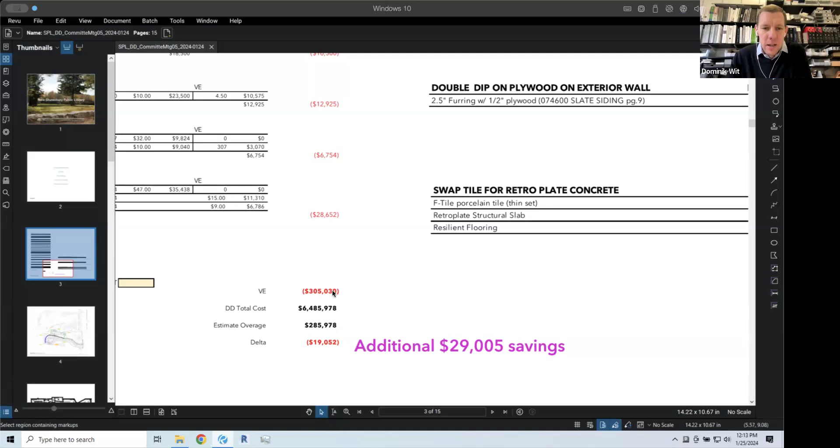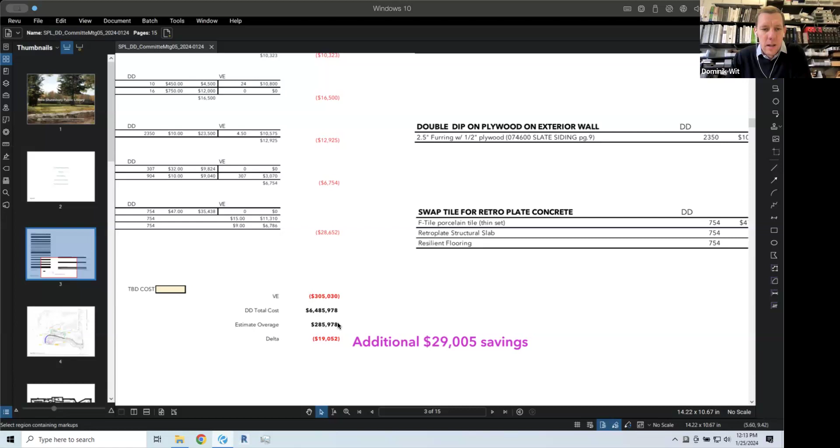Looking at VE, going to the next slide, I had presented to you previously as a group a bunch of items that were approved to be targeted for value engineering. This is the list here, where we were able to get our target down - we were able to VE $300,000 and get basically down to $285,000. I wanted to highlight here to the right, there were a couple of items outstanding.

Replacing the concrete sidewalks with bituminous paving - my estimates were very close, so we managed to confirm that item here. There was a double dip on plywood, initially an estimated square footage cost, that was confirmed, so we actually saw a little bit of savings here with this number. And then we investigated retroplate concrete finish for the entry lobby and circulation space - we were able to see $28,000 savings there if we go with that. So we've rolled those back in.

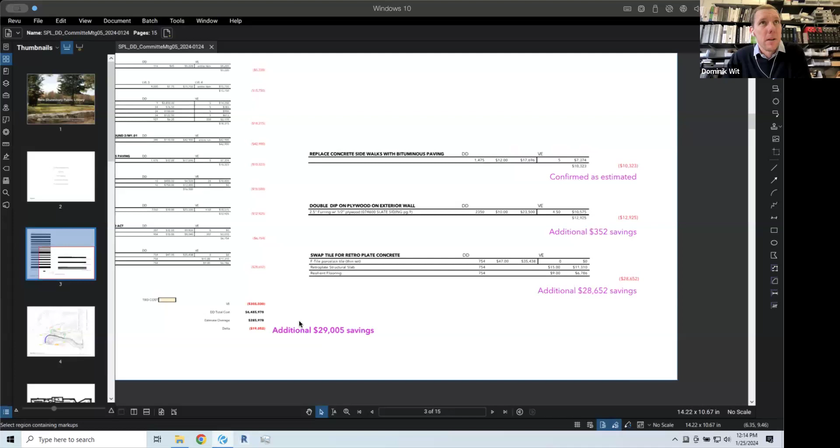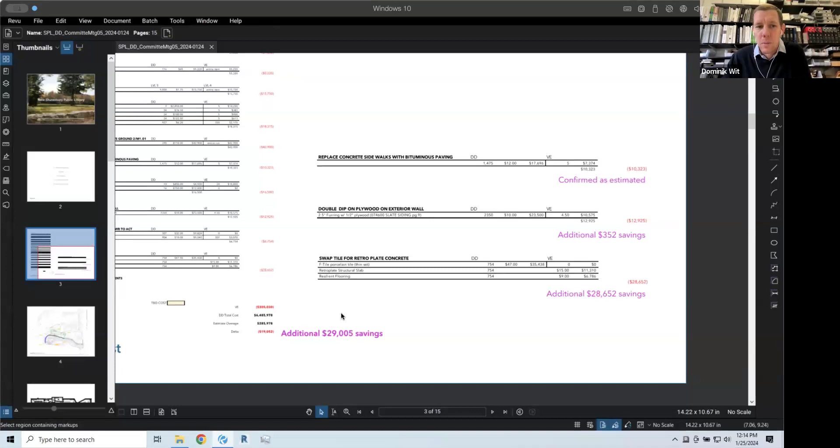I wanted to just highlight that, being released into CDs and going through CDs, we're going to continue to investigate cost-saving measures, some of which are the acoustic ceiling treatments. We've been discussing with our acoustic consultants alternatives for acoustic drywall, which we will continue to do and we'll review with you.

And as well with mechanical - our mechanical engineers are looking to, for the transformer, swap out aluminum windings instead of copper. These cost-saving measures we are not evaluating until the 75% pricing set, but our mechanical engineers are also spearheading value engineering strategies, that being one. By swapping to aluminum, the difference between aluminum windings and copper is an efficiency question, and because of the small size of our transformer for this project, the efficiency to use copper is not really warranted. So our mechanical engineers are very comfortable to swap to aluminum - we don't really see a great efficiency required there, so they're happy to make that transition.

They're also looking at changing electrical conduit in plenum spaces. So we actually spec electrical metallic tubing, which is nicer, but we can change that to metal clad - it looks like a perforated pipe. That's just a very simple cost savings measure, so we decided to focus on that as well.

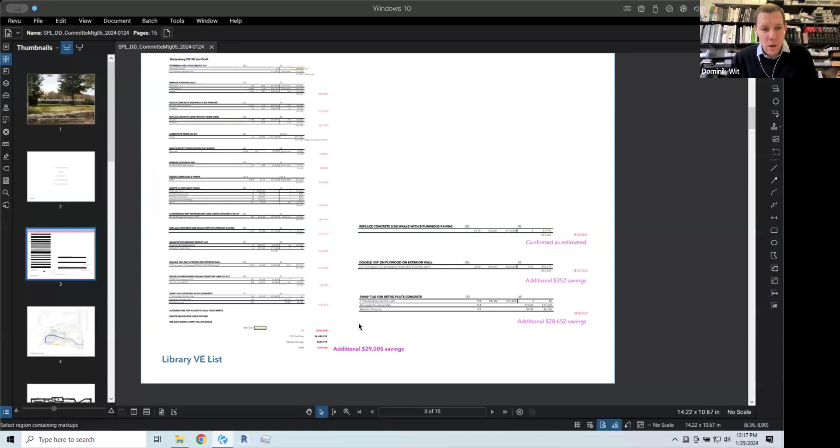And then the last mechanical item is to separate the ventilation and heating and cooling control systems as independent panels - it's actually more expensive to consolidate the controls panel for both of them. So that's a question to the library and the user facilities person: you can still control both systems, right? We have two systems, one's ventilation and the other is heating and cooling. If we make independent controls for those, we save some money.

Dale, I see your hand up. Yes, I just want to make a note that in this area, we generally do not run condensate pump water to the exterior, mainly because of freeze-up problems. So I would suggest a strategy where we can do something interior, because for sure it will freeze.

That's a very good point, Dale, and I know our engineers are aware of that. I haven't fully investigated the infrastructure or what their thinking was to do that, but if they agree and warrant that it should go inside, maybe there's something in the janitor's closet that we could bring it down into the mop sink or something. That's a very good point - thanks for bringing it up, and I'll definitely make sure to coordinate with them about that.

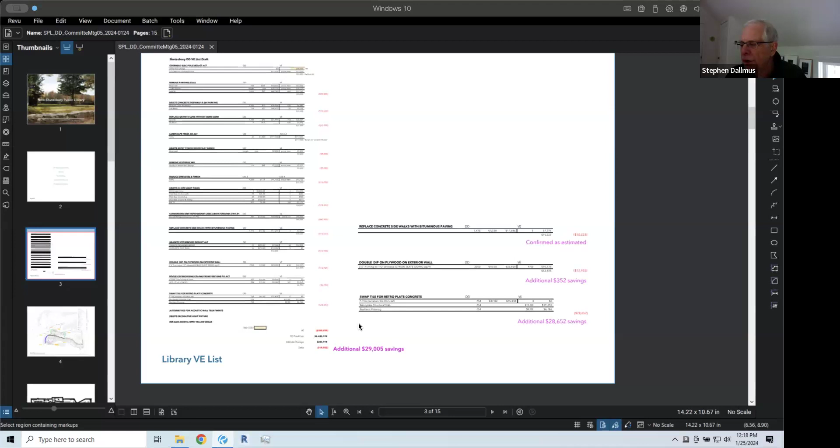Stephen. Is this condensate water from the ERV, or is this from the... Okay, yep, that's right. Thanks. Yep.

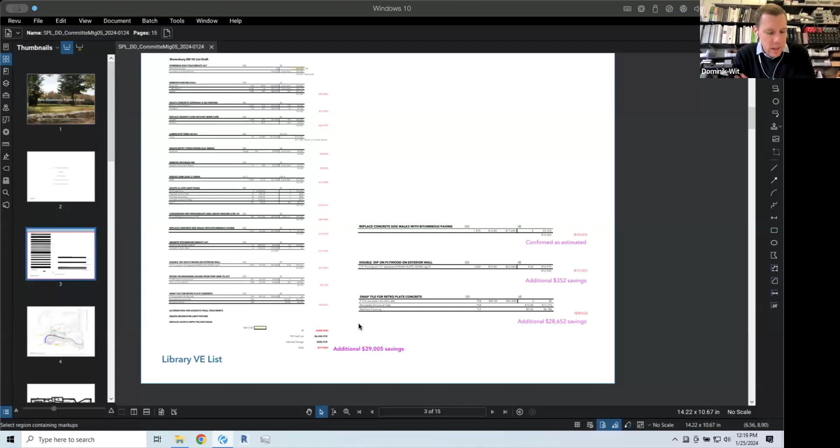And then related to the other divisions, landscape has a lot of value engineering going on. I wanted to bring up a plan here that highlights some of the strategies we're incorporating.

I also wanted to mention that our landscape architect is investigating a better unit cost for pavers. Our cost estimator takes a medium line for cost of materials, and our landscape architect feels there's room for improvement. So they'll look to specify a paver that is more cost effective.

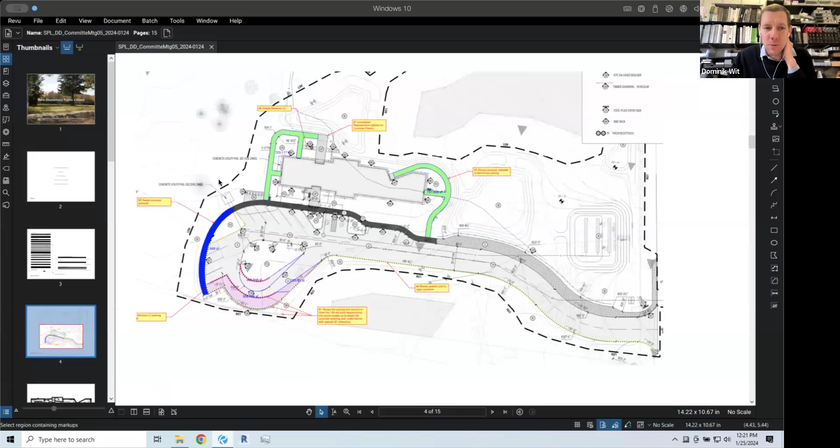They'd also like to have input on engraving and the donation strategies you guys might be investigating, so we'll keep an open line of communication with you and our landscape architects about how these engraved pavings might work. They're also deleting benches. Again, everybody's scrutinizing cost savings as we move through CD, so I just wanted to bring your attention to that again.

Moving on to the plan, quickly highlighting architecturally, we are also looking at additional cost saving measures, not just floor treatments, which we've already looked at. By code, we are able to delete this second egress door to the meeting room, which will simplify the condensing unit refrigerant line entry into the building.

The Library of Things millwork is a high spec finish millwork piece that we are also strategizing to save money on, still having the same function but finished more cost effectively. Similarly, the storage closet for the staff workroom in the DD set was a high spec millwork piece. We can look at alternatives for that.

And again, we're investigating the acoustic wall treatments along this demising wall. Moving on, I wanted to bring up the roof insulation.

We did an add alt. Oh, before I move on, Penny, I see your hand is raised.

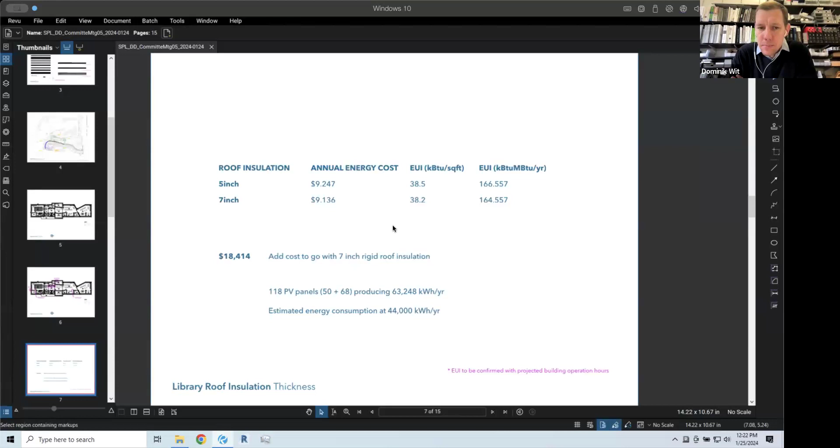Yes, can you go back to the last slide? Sure. Have bathrooms moved? They have not in this plan, okay.

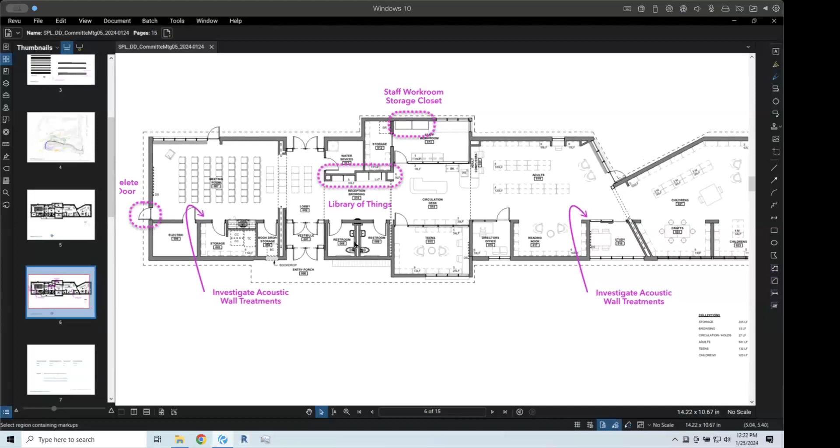I do have a slide at the end of the presentation that will discuss the bathrooms as it relates to code. Okay, I guess for some reason I thought they were next to the community room in previous drawings. Did I misremember that? There were iterations where we had them in other locations, that's right, but this is definitely the location that we held for DD.

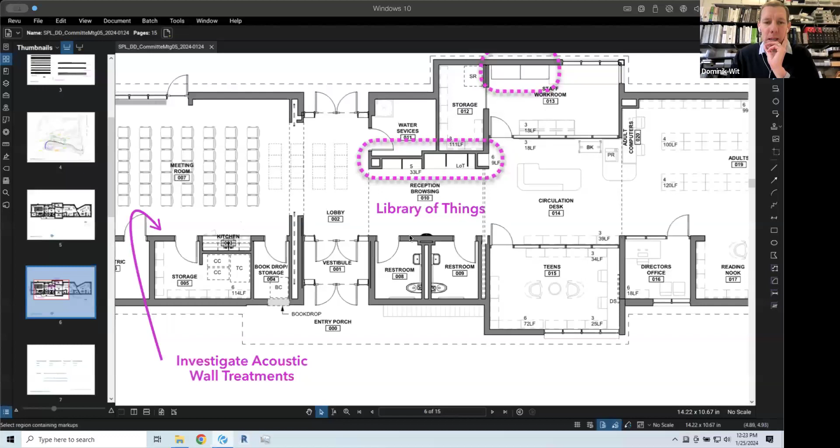Yeah, okay, thanks. Just to orient you again, for after hours we have an after hours security screen here. So we want to make sure we include the restrooms with the meeting room and the spill out space, to make sure that after hours functionality works, and restrooms are available for that.

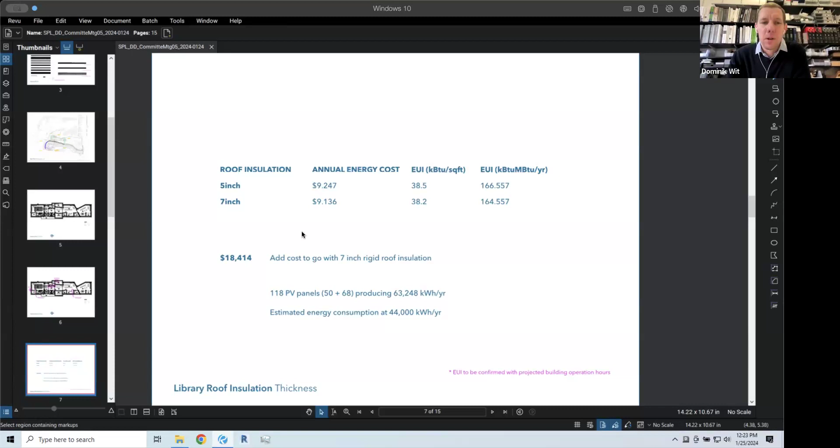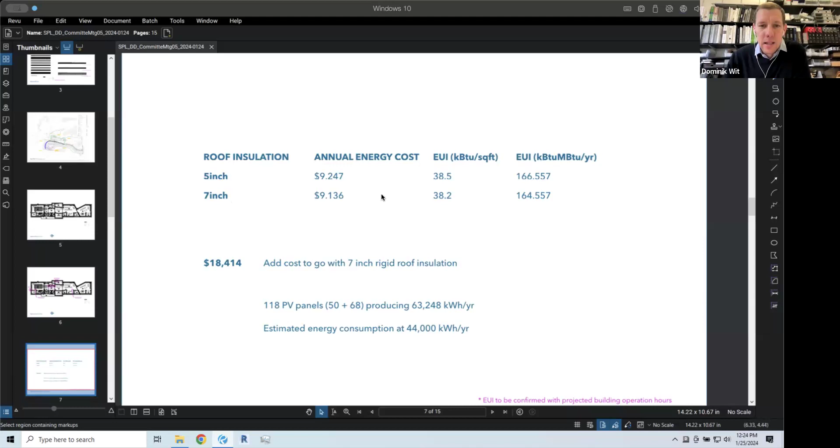So for the DD cost estimate, we did an add alt for the roof insulation. We wanted to evaluate whether we would see energy savings if we increased our roof insulation to 7 inches from the normal 5-inch thickness. Our mechanical engineers did an energy evaluation, and the energy cost savings per annum is negligible for the cost increase to install 7-inch insulation.

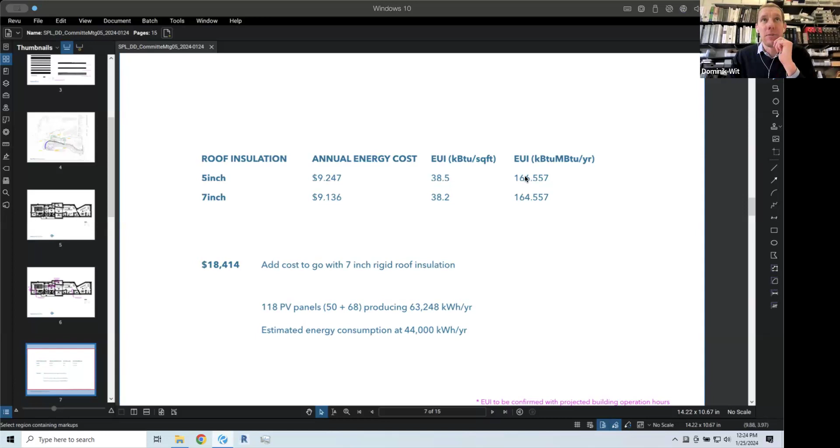So funnily enough, it actually does not really benefit the project to go with thicker insulation.

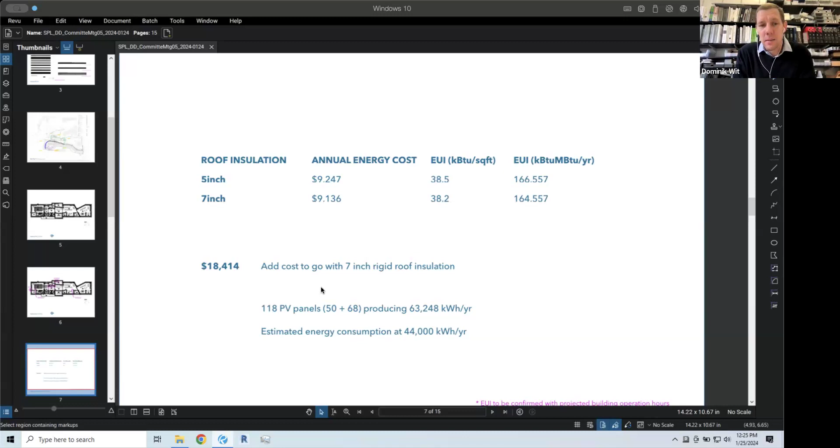We also have photovoltaic PV panels producing energy. We're doing an evaluation of energy consumption to make sure we meet net zero. We recommend that we stick with 5-inch insulation, and we see cost savings there when compared to the 7-inch option.

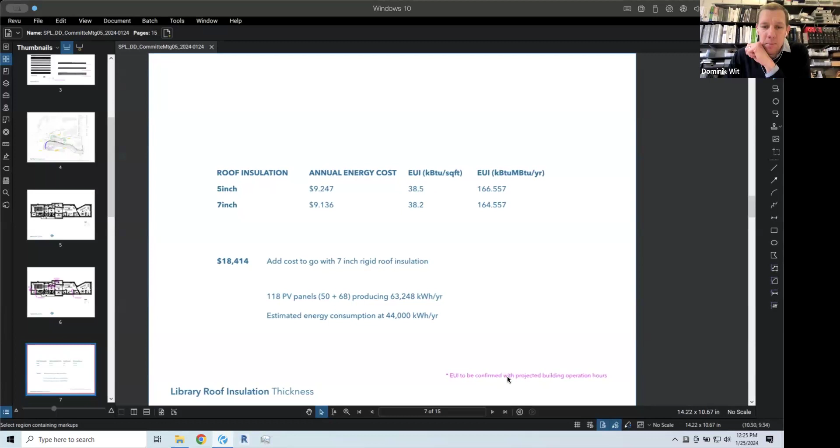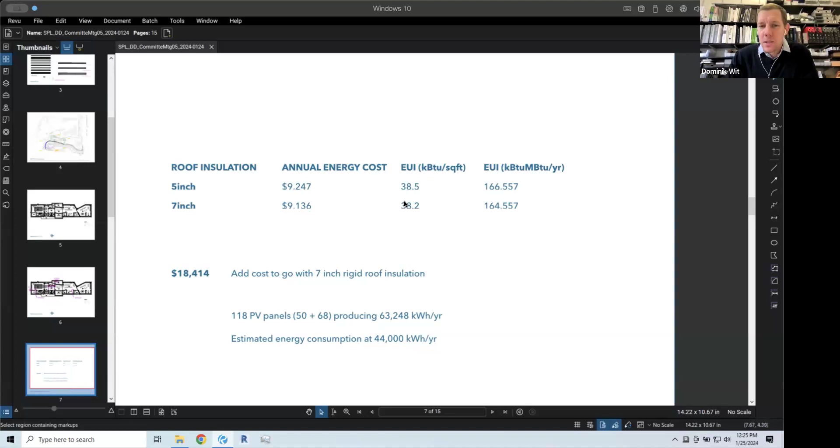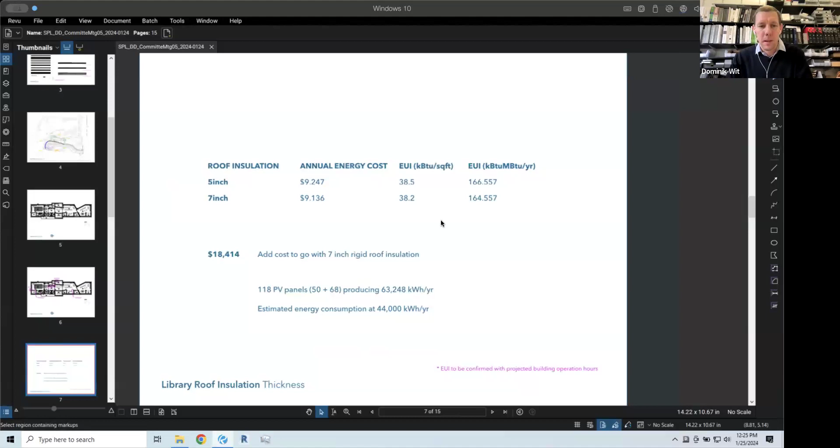There was a question from MBLC as to the evaluation of the EUI. The EUI is a calculation to show efficiency of building energy use, and we think our engineers are calculating a certain schedule of library opening that might be skewing these numbers. So I wanted to bring that up. We will continue to investigate that, and Marianne will coordinate with you about projected opening hours for the library, because the building runs at different settings when you have patron visitation versus when you're closed.

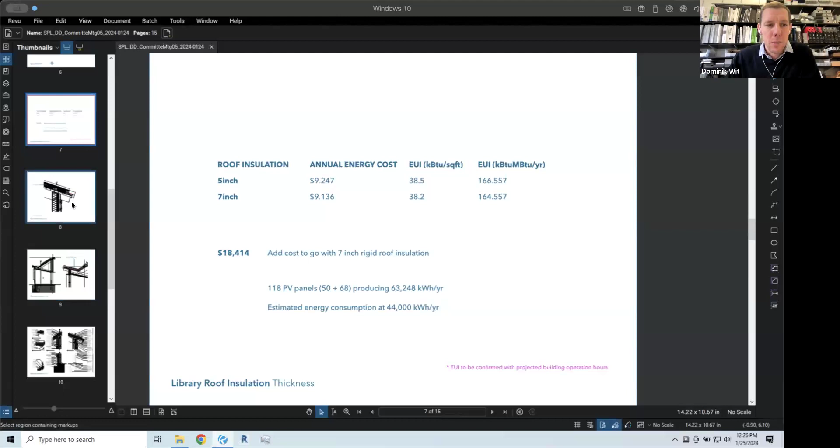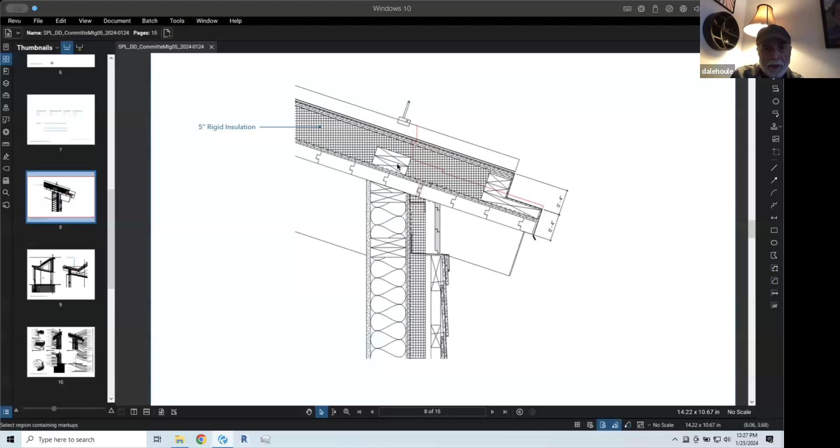Yes, Dale. I'm curious why the double blocking on top of the wall - it creates an obstacle for getting a tight fit on the insulation. Yeah, good question. It's a requirement from our structural engineer - it's additional chord blocking, as they call it. It helps support and make the roof rigid, it reinforces the diaphragm of the roof plane. That's my dumbed-down version of how I understand it to work. We definitely need this, and it's a common detail we've had to implement on tongue and groove wood deck roofs with glulam girders. So that's the explanation for that. Okay, thank you. No problem.

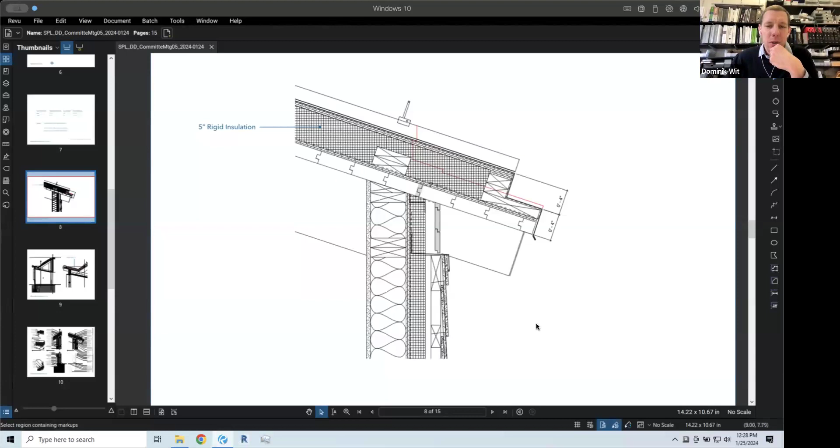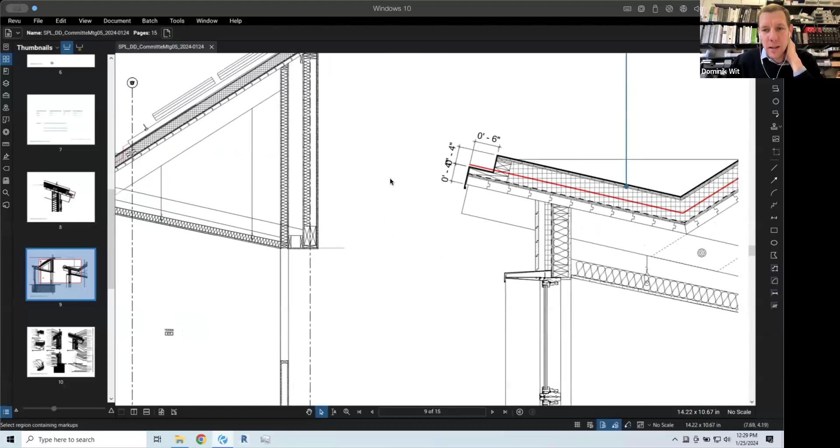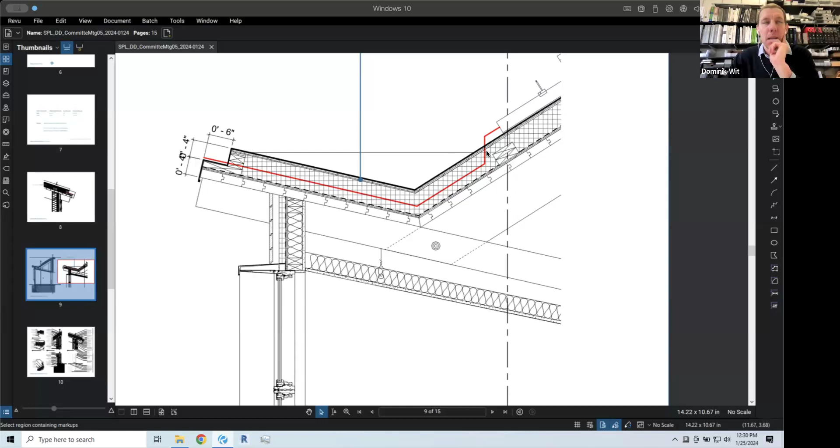We have reviewed this with our roofing consultant, Garland, and I have some details to go over. This is a blow-up of that same section, showing continuous 5-inch insulation. This cricket line is the high point at the midpoint of that upturned roof - I can explain that in a roof plan. Behind it and to the foreground, that cricket then lowers in elevation so it can drain on both ends.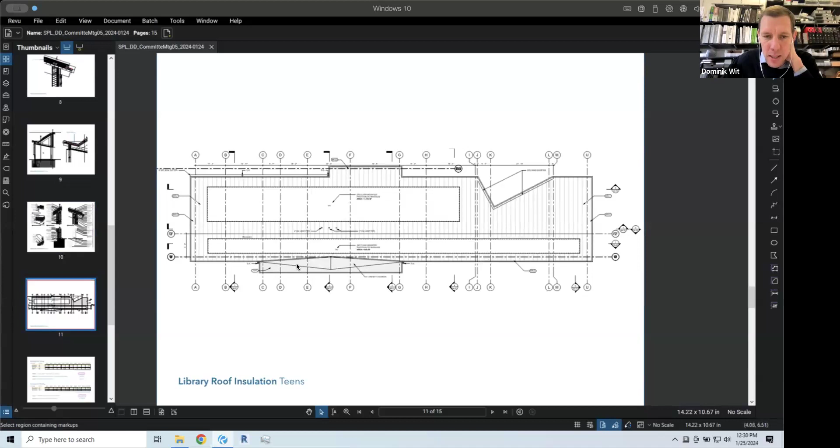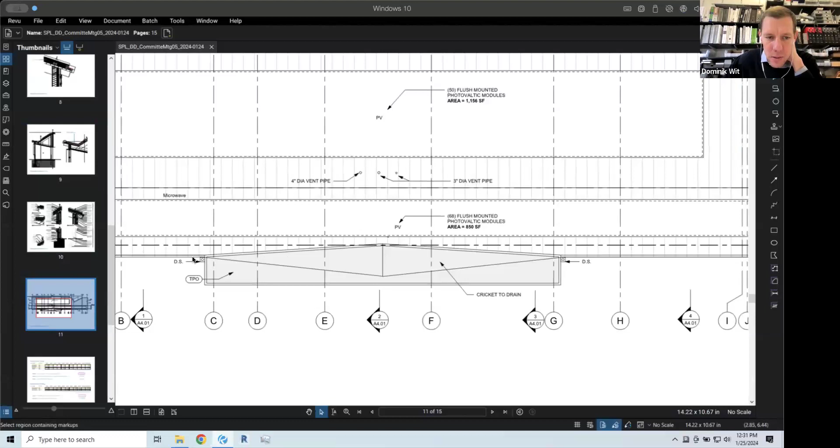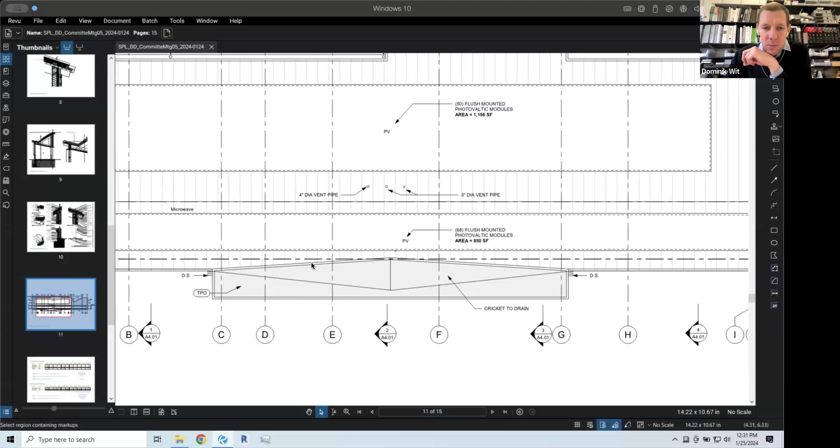I might actually skip straight to that roof plan. Here you see a roof plan - this is the upturned entry roof porch condition. The intent is that you have the upturned roof extents, this diamond triangulation, and this ridge line is the high point. From here, the water will drain to this downspout and then again to the south. I've coordinated with Garland about this condition, and we've come up with a solution so we can detail the transition between the standing seam roof and this PVC roof to simplify replacement if required.

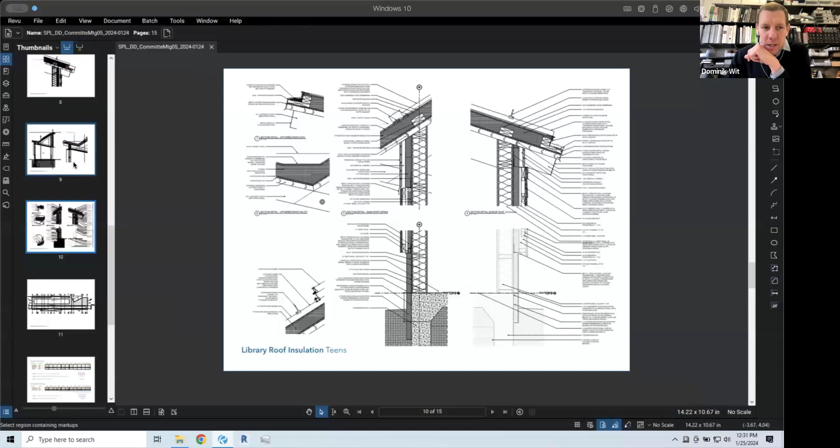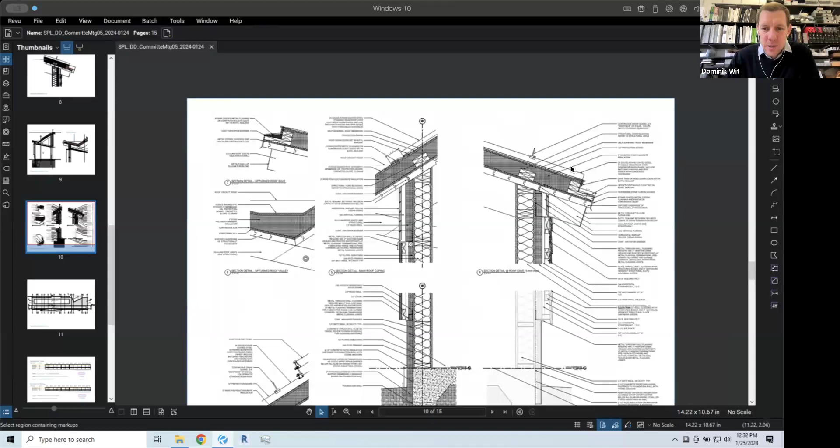So I wanted to show some developments we've been working on. Here you see multiple roof sections that relate to this portion of the roof - the PV and the snow guard, the standing seam roof transitioning to the PVC roof, and then the edge condition at the eave. We take these details and lay them out on a sheet like this, which would be part of the CD construction drawings. This is a common eave detail we've looked at previously - what I wanted to focus on was this transition here, at the exterior envelope.

You would have a standing seam roof that transitions to a flashing detail that allows us to pull the PVC membrane out from underneath the standing seam roof. So by doing this, we have two warranty timelines. The standing seam metal roof can be a 40-year warranty, and the PVC can be 30. If there was ever an issue with the PVC, it can be replaced independent of the standing seam roof, thus not affecting your PV or the metal seam roof. So you could effectively replace this independent of that other roof.

Previously, we had detailed it so that it would slip in underneath that. And if you had to replace the PVC, you would have to lift the standing seam roof. So we think this is an effective solution to separate the two materials.

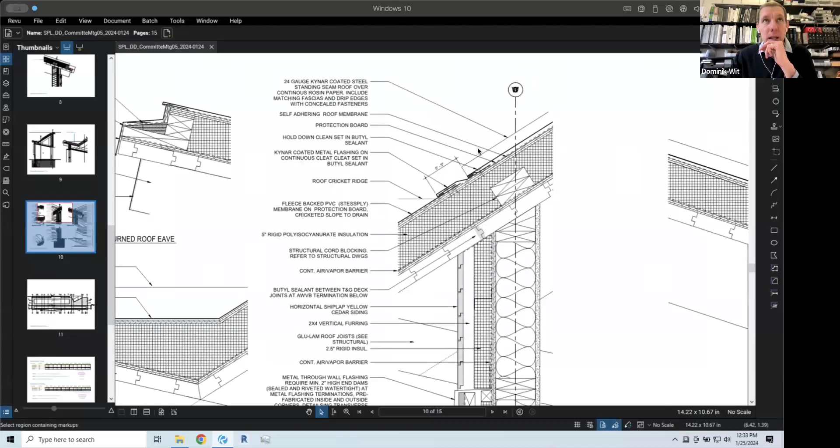It's a relatively simple detail, and Garland have reviewed this and taken no issue with this. So I just wanted to include that because there were questions about the maintenance about these two materials.

Stephen, I see your hand is up. Right, so if you want to make that detail a little bit larger again. Yeah, all right. So your cursor, if you go down the slope a little bit, okay, right there, it looks like a nail going in.

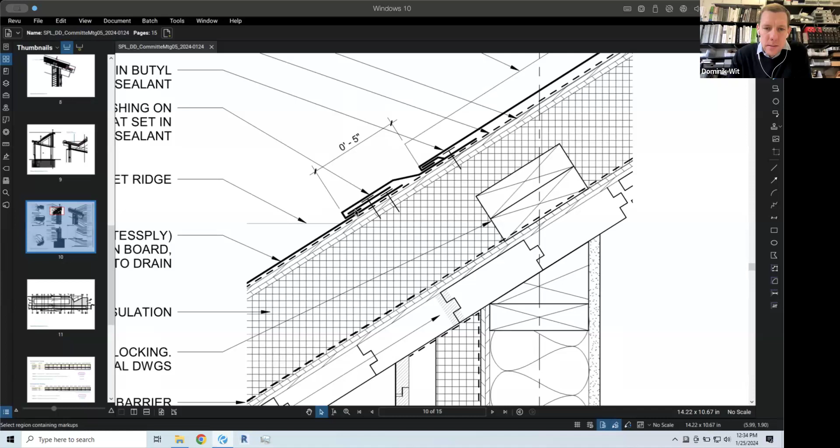And then just to the right of that, there's another nail. So the nail to the right is for the TPO, correct? That's right. All right, so then the nail to the left, which is under that flashing transition. Yep. How is that holding another piece of flashing material?

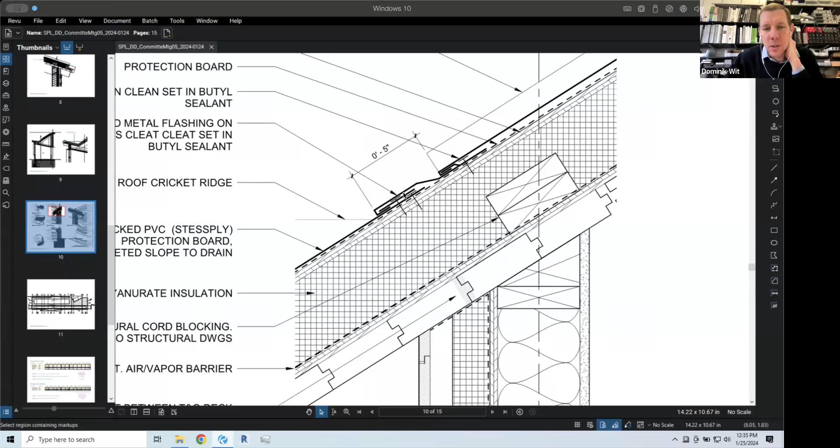Yes, so this is a clip system, and this assembly is a cleat that this piece of flashing attaches to. So I'm just not understanding how you initially attach the nail on the left to this one here. Yeah, because it's under that flashing.

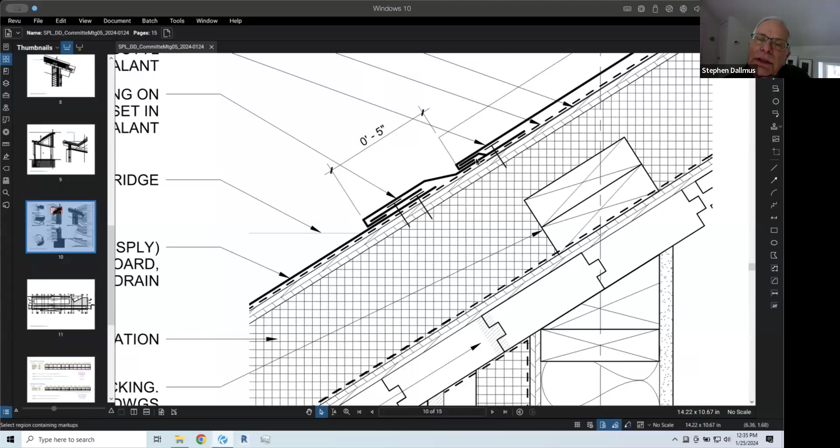And that's also nailed up under the standing seam, correct? Yes, that's right. So this cleat gets fastened on first. And so that, as I understand it, can clip. So this piece clips onto this and can be unclipped from that without having to remove this.

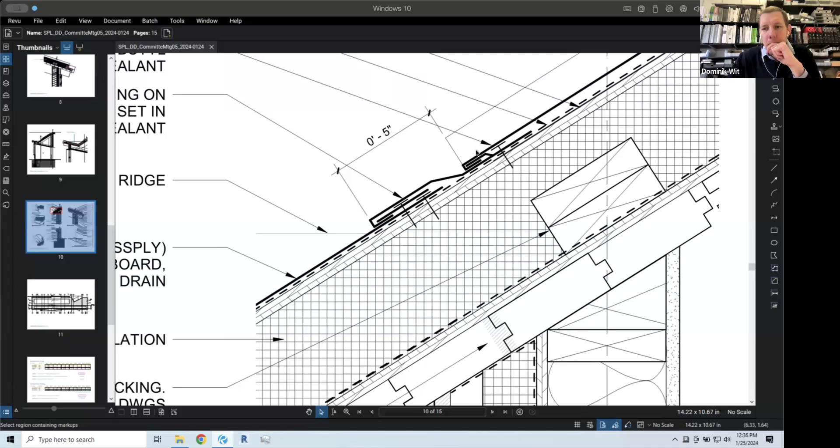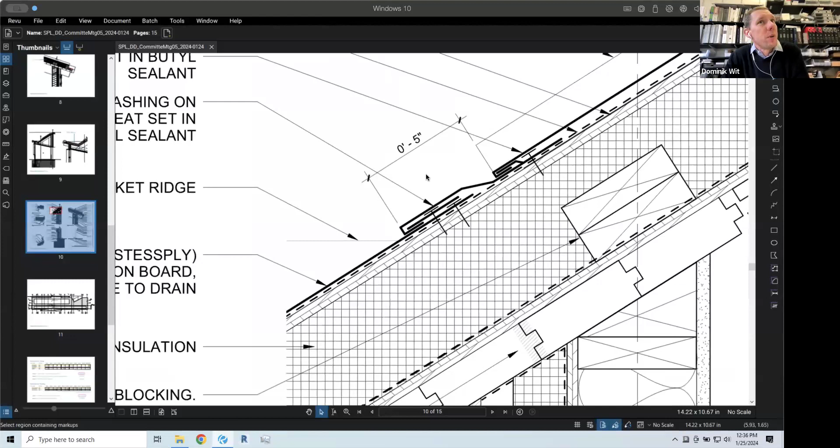I don't fully understand how that can be done. But I think I'm just wondering whether I can do a sequencing explanation for you that might be difficult to relate to here. Yeah, maybe I should follow up with you. Yeah, okay, Dale, I see your hand is up.

Yeah, as well, I mean, I'm following what you're doing, Stephen. It's a two-step process where you nail the cleat down and then you clip this thing on over it and then nail that down and then bring the upper roof over that. So it's a step process.

But the thing is, it seemed to me that the last time, when Jeff finally signed on to approving this, it was based on a lot of overlap of membrane roofing up underneath the steel panels. And I see this as a very nice, quick click system, but boy, I wonder if it can really handle the job. Based on this detail alone, I understand that Garland's going to assume the responsibility, but it could be a real problem in the meantime. I think you understand what I'm saying, that there isn't a lot of overlap here in this setup.

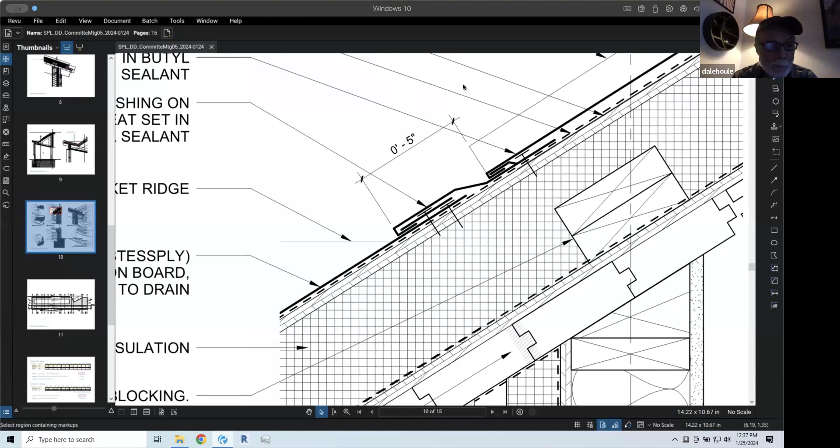And if there's any area where everything is not, well, of course it has to be click tight, but you don't really know these things until the first snow or the first real freeze up. So that sort of concerns me a bit, that this is not the same system that we approved before when we said that this was okay.

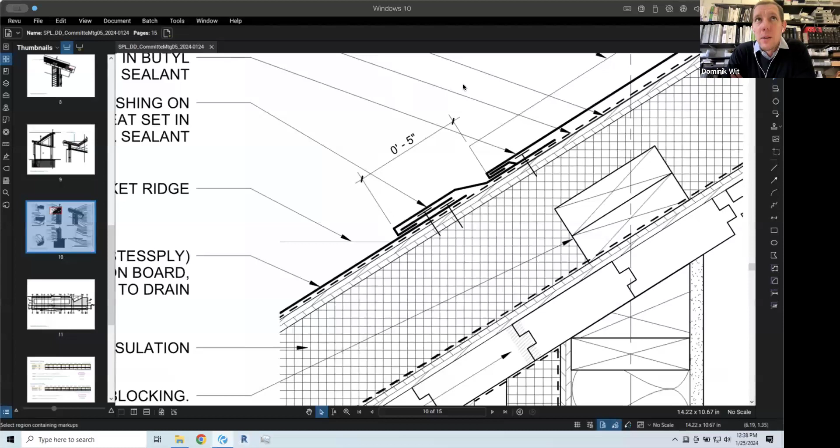That's true, it is a variation to that. I think the intent, and as I understand your question, it's about integrity of this detail. The motivation here was about allowing the PVC to be repaired or reinstalled completely independent of the metal roof, so that you do not complicate the metal roof or PV. Garland already owned the full warranty of the previous detail. So if the PVC ever had to be replaced in the previous detail, it would require the metal roof to also be partially removed, implicating PV as well. So Garland owned the full system in their warranty.

And I believe we brought it up at the last meeting. I do have warranties from Garland, so I'll share that with you so you can scrutinize what the actual documentation stipulates. But yes, Dale, this is a variation of the previous detail.

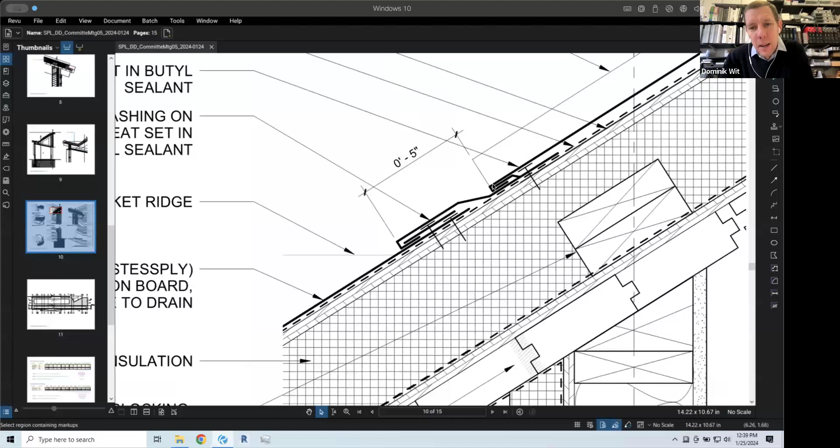So the previous detail really had that PVC coming all the way up underneath. And this is looking at...

It's also worth mentioning that while we're working this out with Garland, our plan is to get to a point where we've got details worked through with Garland that work from their standpoint, within the context of their warranty, and then hire Simpson Gumpertz & Heger, an exterior envelope consultant we work with a lot, to do a peer review and give us their take, and any modifications they would make.

We do not have them engaged yet on this project, but I think this is one area where we'd want their expertise, so we were planning to get these details to a certain point and then have them do a peer review.

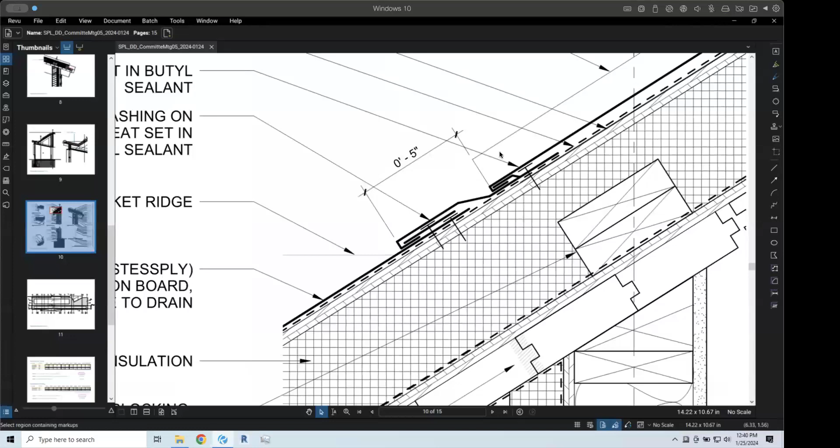So yeah, we continue to develop this, and to Matt's point, hopefully with peer review from exterior envelope consultants specific to this area, that could help alleviate some of the concerns here.

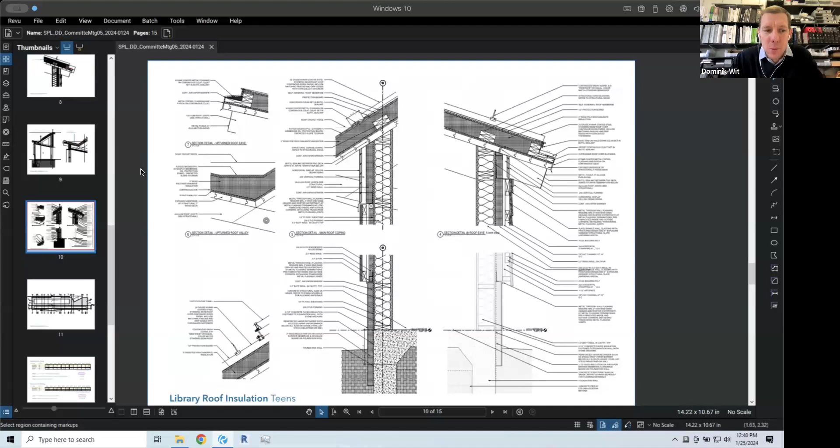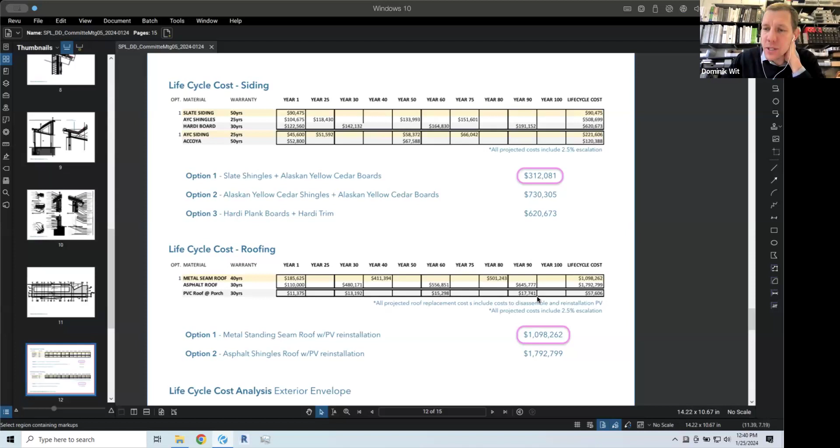So that's what I had for roof and roof insulation. I did want to also bring up life cycle cost analysis. This is a single sheet document in response to the MBLC, who requested this information specific to the exterior envelope. Let me explain the layout of this.

We have an upper portion that analyzes the siding of the building, and the lower portion is for the roof. If I zoom in, on the left are the different materials for the exterior siding, their warranty, and the cost to install in year one. This timeline goes all the way up to 100 years, our evaluation timeframe, and the final column is the total life cycle cost.

So from year one, this is the cost to install. Then at these intervals, I'm calculating the warranty period as the time the material needs to be replaced. Now, the caveat is I think you can get longer performance on certain materials, but I needed to use the warranty as kind of a life cycle evaluation.

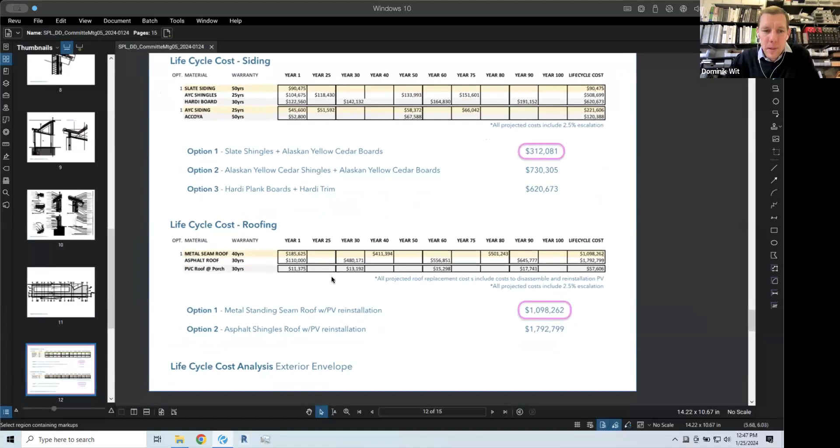So that's siding. I'm happy to go to roofing next. With roofing, we have a metal seam roof, which is a 40-year warranty product. At initial installation, it's $185,000. Every 40 years, you'd have to reinstall.

These numbers, this initial buy-in cost, does not include PV, photovoltaics. But the PV needs to be removed every time you reinstall, and that cost is then included at these additional replacement intervals. So at 40 years it's 400, with escalation, again a conservative one. We're seeing a much greater cost here for the replacement because you've got to take down PV and reinstall them. Again, 500 at 80 years. So you're looking at about $1 million for the metal seam roof over 100 years.

Asphalt shingles have a cheaper day one installation cost, but only a 30-year warranty, so it requires one additional replacement. The same PV dismantling and reinstallation is included here, and you're looking at 1.7 million. So what hurts asphalt shingles is the fact that the PV has to come down and go up again.

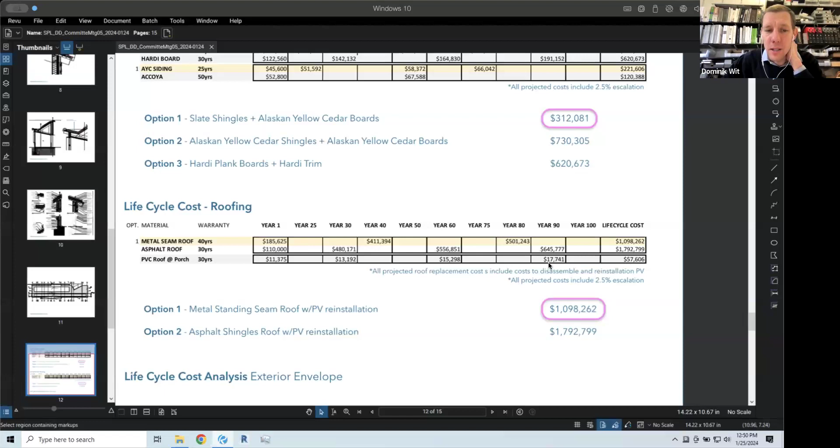So that was our life cycle cost for the envelope in response to the MBLC's request for this information. We think our recommendations for slate and cedar make sense here just by virtue of cost savings. Also minimal maintenance, and metal standing seam roof as well, simplifying the assembly, with fairly significant savings against a secondary kind of assembly construction with the shingles.

I'm happy to move on. Again, you will get this document when I send it to you, so you can review and feel free to reach out with any comments or responses.

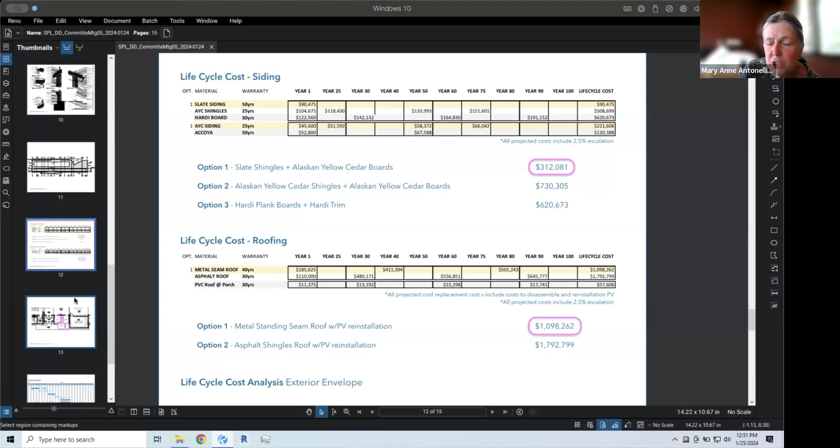Mary Anne, I see your hand up. Hi Dominik, I just wanted to ask if you have sent this particular document to the MBLC. I don't see them here today. I have not. I would like to hear their response to this too, their critique of the information, if they want to see anything else. So if you could send it to them and include me, just this slide, so they don't have to sort through everything. I'm sure they'd appreciate seeing it. Okay, yes absolutely, will do. Great, thank you. You're welcome.

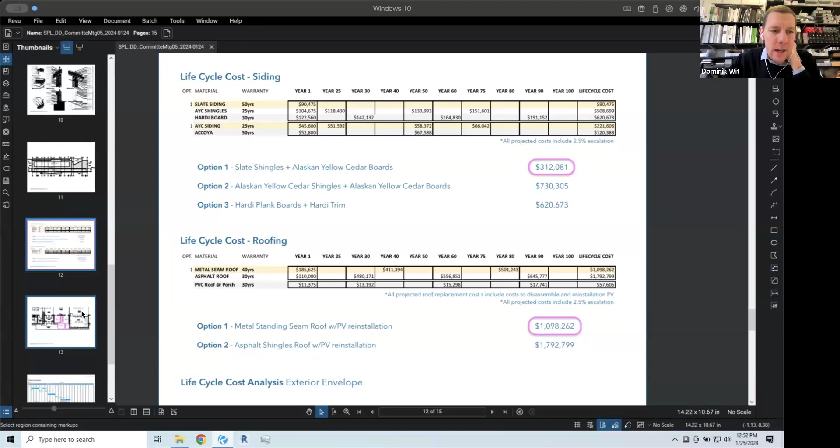And then the next and last thing I wanted to mention is that the plumbing code, which I mentioned at the last meeting, has been revised. Late December last year, the Massachusetts Plumbing Code, Division 10, was revised such that it now requires additional bathroom fixtures for occupancy loads. We've been very busy with our plumbing engineer and code consultants to better understand the implications on our project.

What we've gathered is that if we were to meet the code as it stands now, we would need to introduce an additional toilet and sink for the women's restroom. Previously we had two gender neutral restrooms, single occupancy, to facilitate patron and staff. Now as we understand it, we need to increase the women's restroom.

We need an additional stall and sink. The other thing we'd need to include now is a floor drain, which we are negotiating with Heritage, the septic designer, to see if that needs to go to septic or can go to the tight tank we have.

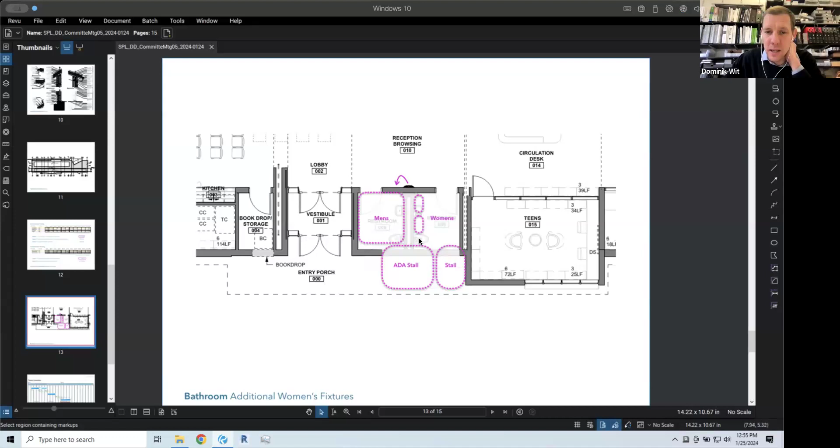At the same time, we're also investigating what it would take to include an additional stall. So here you see a high-level schematic. There is some room in one of these restrooms that we can pinch a little smaller, and potentially allow this restroom to grow and become the women's, taking the area currently covered by the entry porch. But this is not fully vetted yet with our code consultant, so we're playing both avenues at this point.

Marianne: And so would the restrooms have to be called men's and women's? Yes. So the new plumbing code is requiring... I only mean, by men's and women's, I wouldn't call either of those gender neutral. No, they're not, sorry, I was preemptive there. Okay, so you mean the code requires gendered restrooms?

Right, only by virtue of their requirement that the women's fixtures are doubled. The requirement for occupancy is basically doubled across the board. The issue is that the calculation has to be done based on gender. That's not to say the bathrooms have to be designated by gender, unless the only way to accommodate the fixture count is to have a multi-stall bathroom. If you have a multi-stall bathroom, it has to be a designated sex - you can't have a multi-stall gender neutral bathroom.

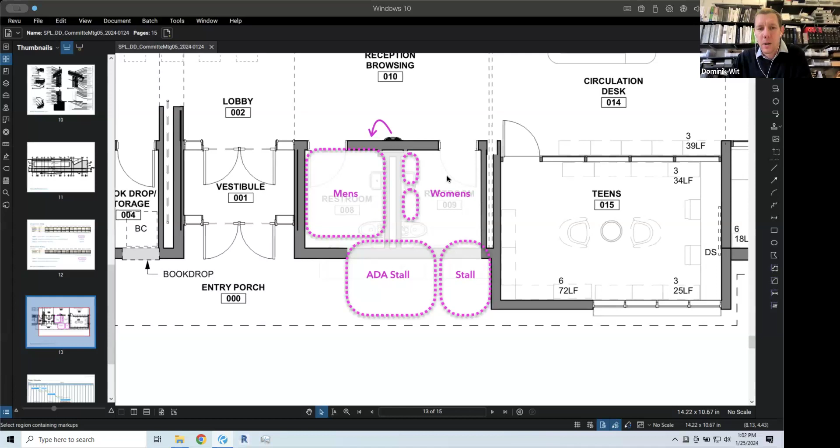So where you have the ADA stall and the new stall, those are bump outs of the building. That's correct. So what do we have? I don't have it on the top of my head, what we have for wiggle room between what we have now and the 5,000 square foot.

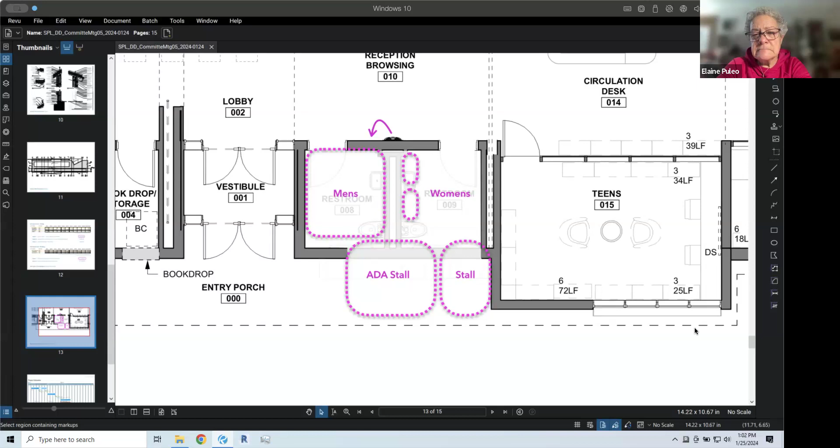So the attempt for this layout is to still stay within our roof footprint. Okay, and so we're trying to massage a lot of things here. The roof footprint is the dotted line. Right, okay, yes, that's correct. I see. Okay, sorry Elaine, I should have explained that.

We're trying to stay within this teens room. We currently have a pop out, and it's a nice accentuation of this program. We really don't like this architecturally from the entry experience, right? We're really confined, or we're blocking the view to entry by doing this too, right?

I don't think it harms the walking, the approach from the parking lot. You still see this, but this is a tough one for everybody. But funnily enough, I think, Marianne, your argument to meet all community requirements and needs - this one does not, you know, it's against that. So we'll see what we can get out of the building inspector. Okay.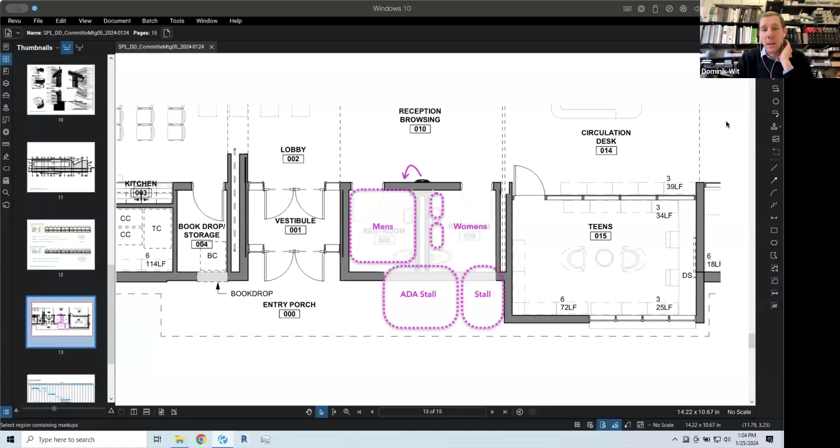So quick update on that - stepping away from this item - lastly, just to round out our presentation, we're looking to meet with the different town agencies. We're setting up a meeting with National Grid, and then we'll also coordinate with you, Elaine, and Marianne, and CMS as well, to engage all the departments - fire, police, etc. So we'll continue that effort.

Can I ask one more question before we leave this bathroom issue? What does this do to anything to our septic system? That's a good question.

Yeah, unsure. We know we need to include an additional floor drain, and I think that does that tie into septic or the tight tank? And then the question to an additional sink and bathroom would obviously have to go to the septic system.

What we still need clarification on is the septic capacity taken. Does it actually, is that calculated by occupancy or by fixtures? My sense is it's occupancy. So our occupancy hasn't changed. Therefore, we are hoping - we still need confirmation on this - that the septic design does not need to increase.

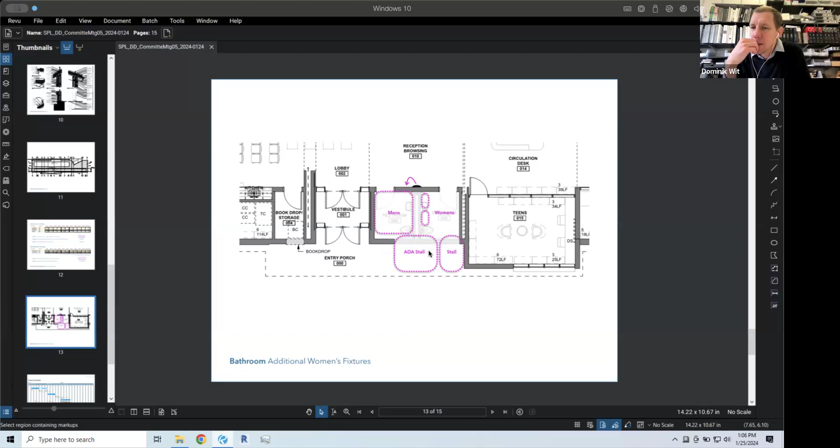I'm 100% confident that the septic design is based on occupancy. Yeah. Thank you. But okay.

That was it for us. Schedule is still the same, no changes there. We continue to meet with our consultants regularly. We're really aiming for the 75% cost estimate, which is mid-March, and then the 100% CDs is kind of mid to late April.

If there are any other agenda items that you'd like to cover with us. No, I think that's it. We have a design subcommittee meeting in a couple of weeks. When's the next full committee meeting? I was just looking for that. The next full committee meeting is February 6th, two weeks from this past Tuesday.